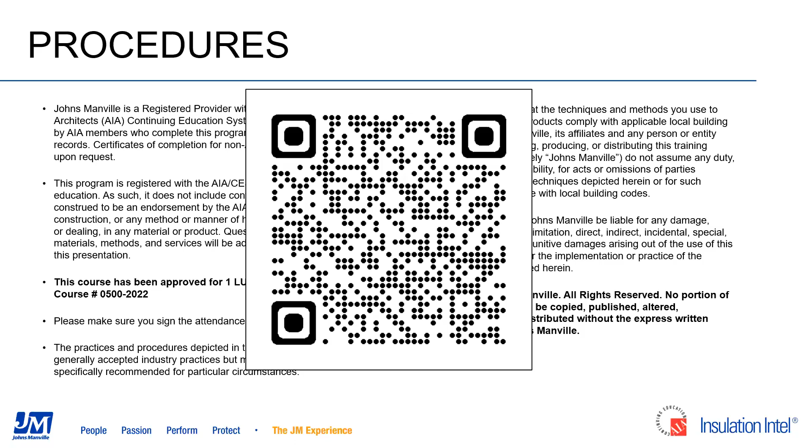So as an overview today, we're going to cover the history of modular construction, review a little bit of the market data, and discover some of the driving forces that are making this an attraction to the construction industry. Review design for modular construction, also look at benefits of modular. We'll cover some design considerations, and then towards the end, we're going to also talk about some of the solutions that Johns Manville has evolved over the last few years here to help, and then cover some additional resources as well.

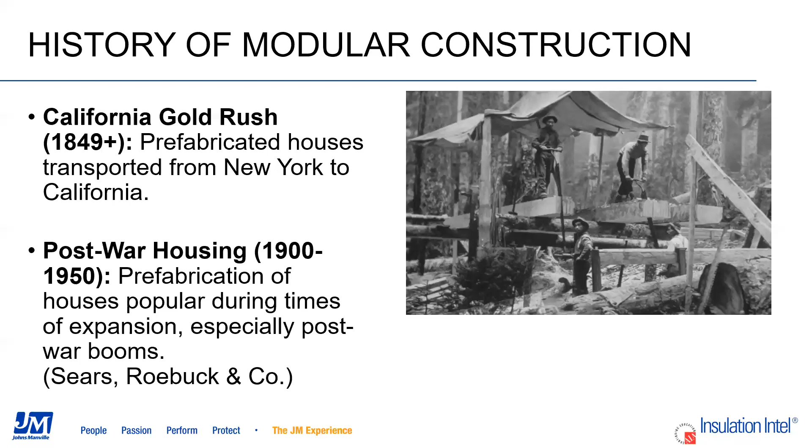The modular or offsite construction has been around since the early Industrial Revolution. Let's take a look at the history of offsite construction in the United States. Modular construction follows economic booms. The first one in the U.S. was the gold rush, following the discovery of gold in the western United States. Pre-cut materials were delivered to pioneers by the new rail lines to assemble on site.

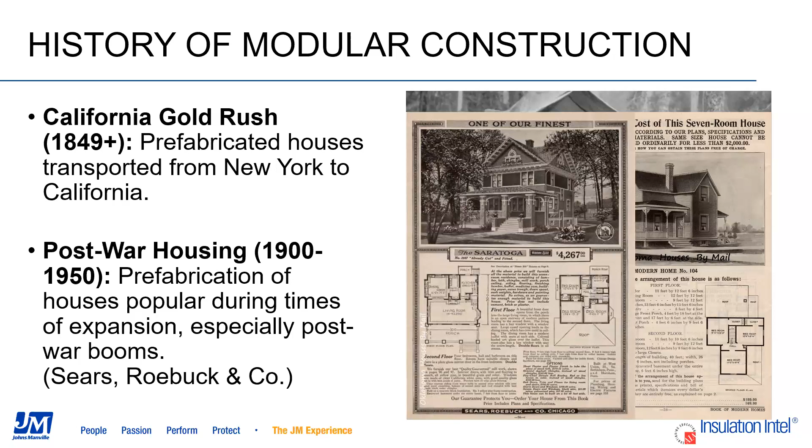Second notable boom occurred in the post-World War housing. After World War I, Sears and Roebuck offered multiple pre-cut material packages for designs that could be selected from their catalogs. After World War II, the actual off-site fabrication, or industrial manufacturing of house walls and components, began to occur.

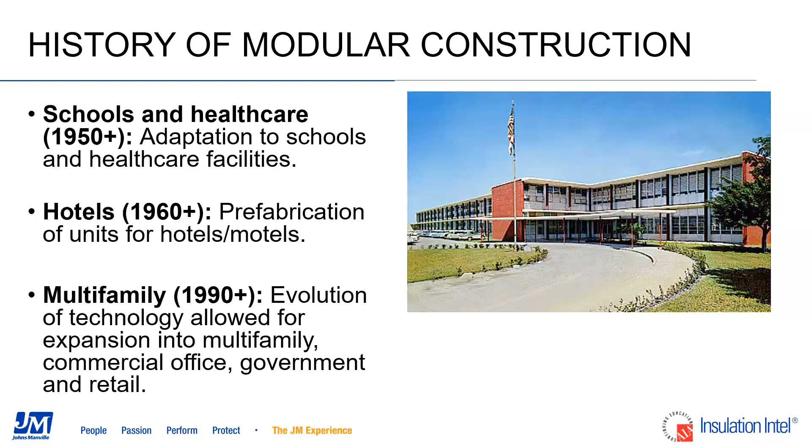Also during the 1950s, elements of schools and hospitals began to be built off-site and assembled on-site. You can see the repetitive units that encouraged this approach.

In the 1960s, we saw a boom in motel and hotel construction, marking the entry into the multifamily market that we see today. A lull in construction and innovation occurred in the 1990s, which saw industrial concepts applied to the boom in higher density multifamily developments as well.

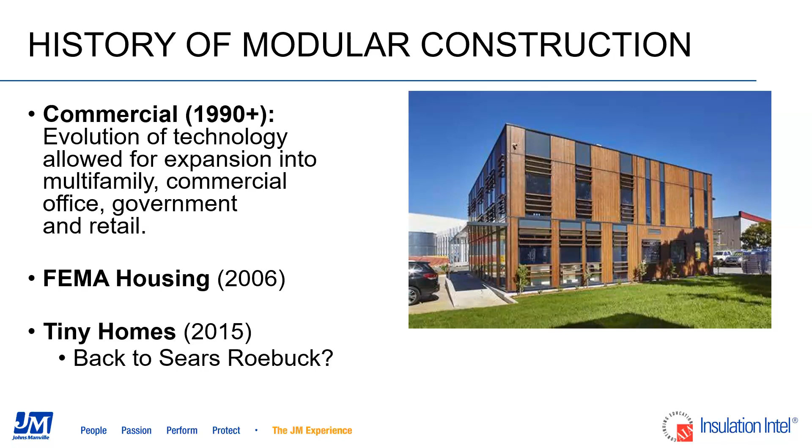In addition to multifamily, commercial and government construction benefited from efficiencies of speed of modular construction. FEMA attempted to implement this en masse after the Katrina disaster in 2006 with some success.

All the previous options are on the table at the moment, from large-scale development assemblies with lightning speed to tiny homes available online from retailers. As we can see, back about 100 years ago, we had the capability of ordering from a catalog an assembly or a package to build a home. It's very similar today because we have the internet, which we can use to order even small tiny homes. So we're kind of making a full circle. It's not new to our environment here.

So let's take a quick look at the market share of offsite construction and review the driving forces of why this construction method is gaining attention.

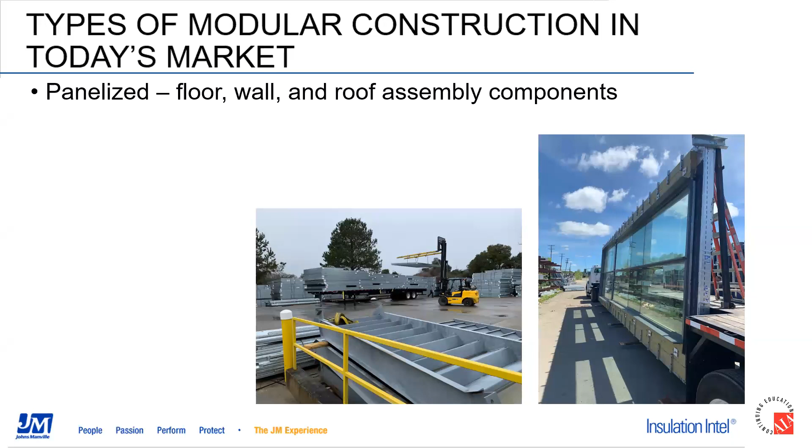There are several modular classifications in today's market. The first is an example of panelized assemblies, which are offsite factory walls, floors, and roof concepts.

One example of volumetric construction was made up of shipping containers. This is a popular delivery method for coffee shops, restaurants, temporary emergency response units, and residential.

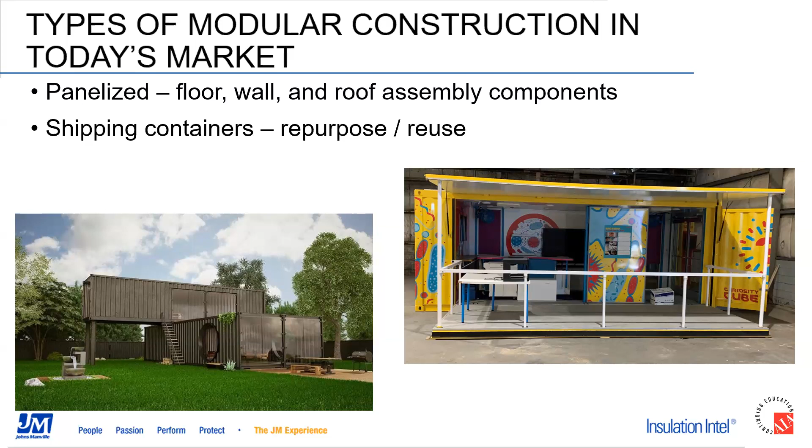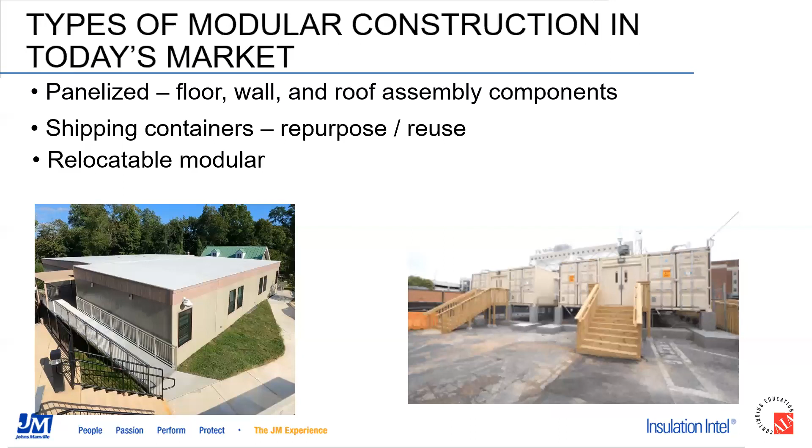Next is considered relocatable units. Don't mistake these for manufactured homes, as these modular buildings are used for commercial applications like school classrooms, medical centers, office complexes, and the familiar job site trailers.

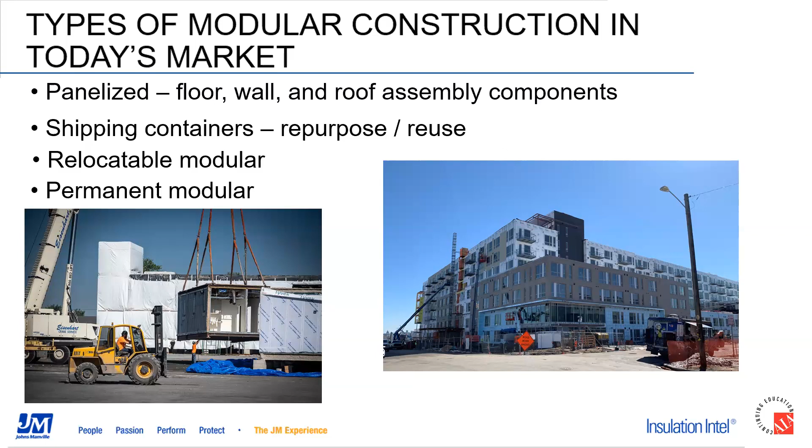Finally, we have permanent modular buildings, which serve a wide range of uses for multifamily, hospitals, hotels, office complexes, and of course single-family units, just to name a few.

A current look at the market share. When we include all aspects of offsite construction, the U.S. market share in 2020 was estimated to be about $27.5 billion.

Permanent modular construction is one of the fastest growing segments in the modular industry. Although between 2020 and 2021 permanent modular was expected to only grow 5 to 6%, the reality is the value of permanent modular construction grew almost 20%.

As you can see in this chart, permanent modular construction market share has doubled in the past 5 years, and it is anticipated that it will double again in the next 5.

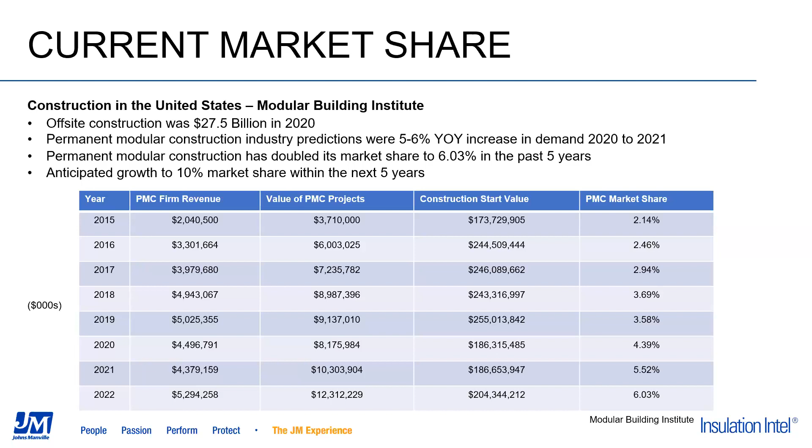So let's take a look at a quick case study. Each of these case studies has its own lessons for its stakeholders.

Carmel Place in New York City was New York City's first micro apartment building. The 9-story building includes 55 micro units as well as a gym, lounge, roof terrace, and garden, and was the first multi-unit building in Manhattan to be built entirely out of modular components constructed off-site.

The building was made up of 65 individual self-supporting steel frame modules, 55 apartment units, and 10 core elements. MEPs were installed off-site, and appliances and interior finishes were installed on-site.

The design team reported that it was a significant benefit to have a factory located nearby. This allowed for weekly visits during the manufacturing process, giving the team the ability to catch and prevent costly mistakes, and supported the increase of communication required for modular construction projects.

The Vancouver Affordable Housing Agency provides the use of currently vacant public land for temporary modular housing developments. These projects are guaranteed to use the land for at least 3 years, after which time they can be disassembled and relocated when the land is needed for a more permanent use.

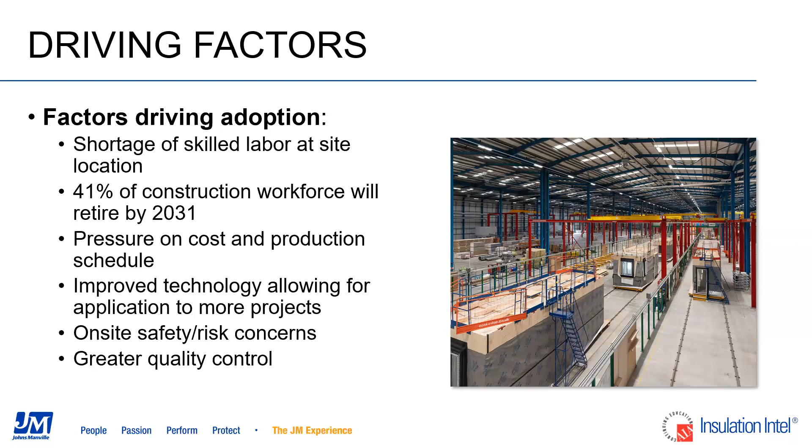Economic factors are making it more viable as well. The cost and speed are primary considerations. As we've all heard, housing shortages and the lack of affordable housing in our nation and across the globe is a huge issue for all of us.

Obviously with offsite construction, the benefits are shorter delivery times. For our clients—developers, builders, and owners—that means they're able to occupy their buildings faster, which then allows cash flow to begin faster, and also reduces the financial burden of financing a construction project.

Public sectors in most major cities—we've labeled London and New York as two large metropolitan areas that need as much help in the public sector as possible. But this is going across the nation, affecting everyone.

Cities like San Francisco, Seattle, Vancouver, and I'll even add Austin, Texas, are all considering modular solutions to help with the homeless population and provide shelters. They're also looking at options to help the lower middle income with affordable housing.

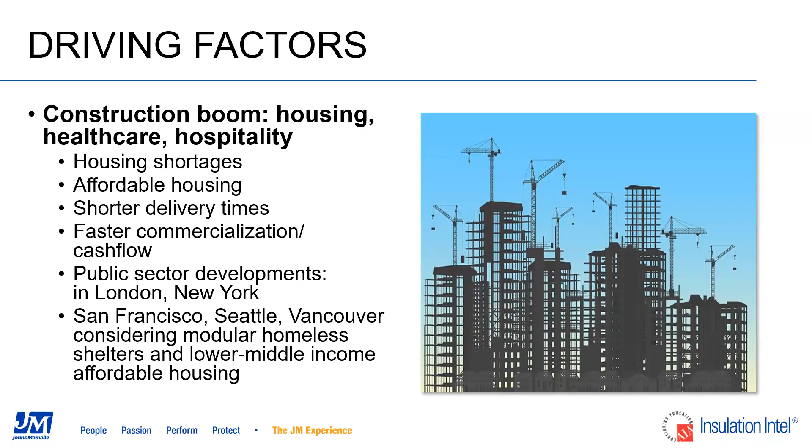I'm going to turn it over to Dwight to cover design for modular construction. Okay, thank you, Jerry. Let's now take a look at how offsite construction affects design decisions.

They're frequently self-contained—they'll probably have their own waterproofing installed, and they'll have structural integrity so they can be stacked and support the structure above. They're transported by truck and craned into place. They may be weatherproofed individually and on site, and hopefully they're weatherproofed on the way out there too. They contribute to the structure of the building and can also form the building core, so you can form stair cores and whatnot out of these stacked structural units.

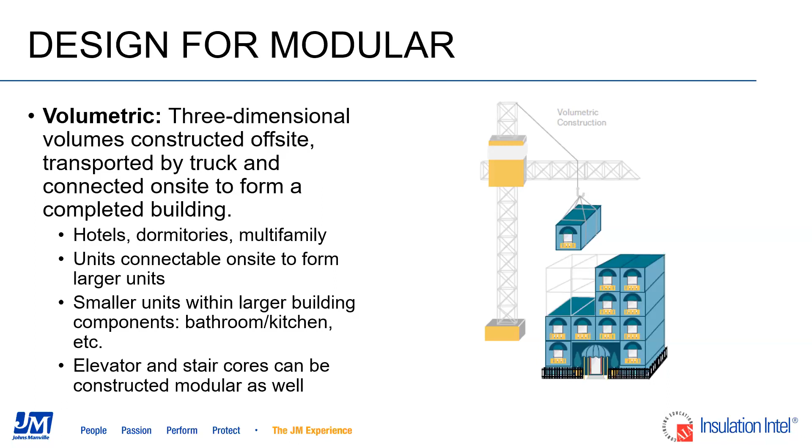Panelized units actually form building volumes on site after assembly. The core of the building is pre-built, probably due to the design program driving the approach toward panelization. You'll have the structure already built on site, then add the panelization to form the building enclosure. They can simply be framed walls, floors, or roofs, or more complex exterior cladding assemblies, complete with electrical, plumbing, and HVAC systems inside for on-site connection. Waterproofing is also a portion of that panelization process.

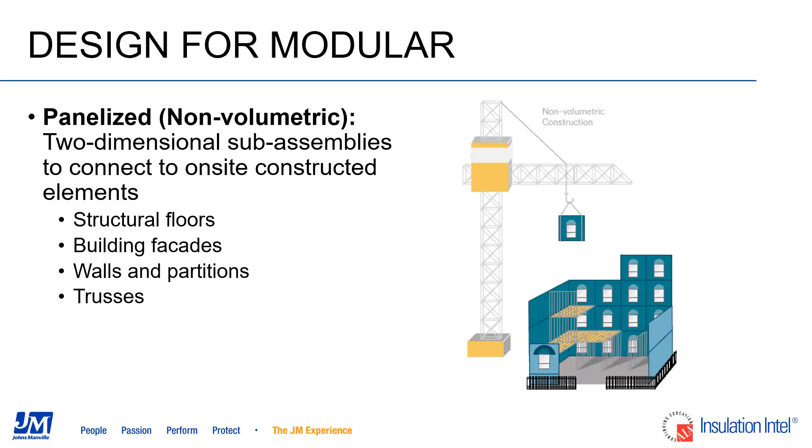More companies can do this from a technical standpoint, from GCs to manufacturers themselves who do the assembly. Less engineering may be involved to design and construct the panelized assemblies, but weatherproofing can actually take longer to achieve, leaving the building open to elements in the process.

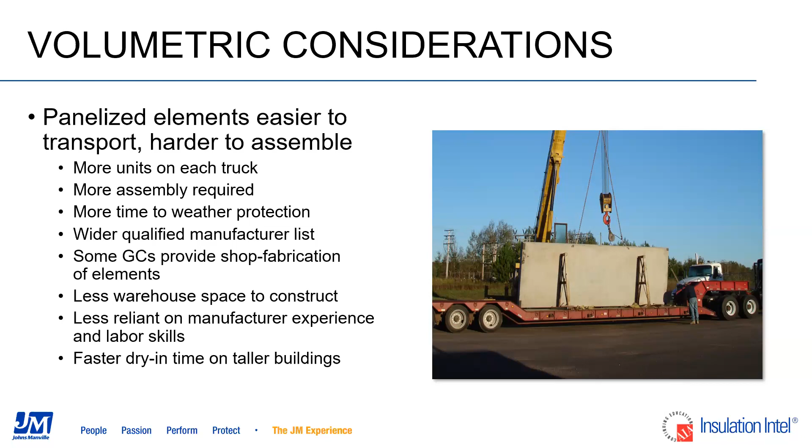Volumetric assemblies, however, require more engineering and design up front, but less time to assemble and weatherproof on site. There are transportation limitations, of course—the height, the width, what bridges you're going underneath, and whether you need to move any electrical lines. There will also be a need for a designated area for staging prior to assembly—you can't just pick them off the truck and put them on the building. You have to stage them properly, which takes space and logistics planning.

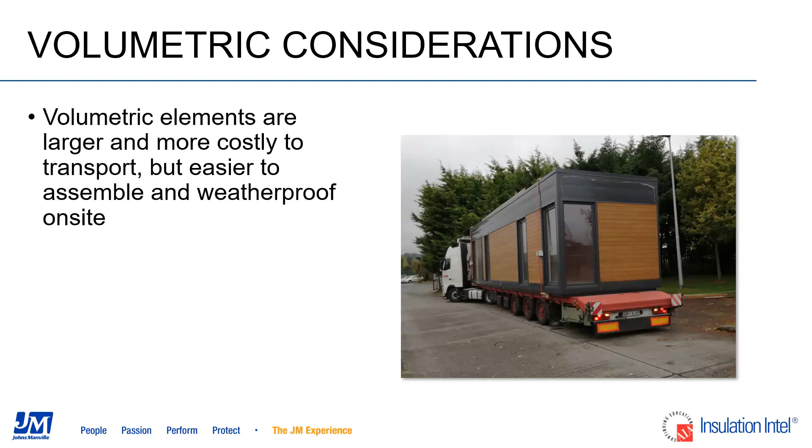So let's take another look at a successful project here. This is a case study for the Heart and Orthopedic Center at the Miami Valley Hospital. After initially considering volumetric construction of patient rooms as volumes, cost and efficiency in their pre-planning study indicated it would be better to break up each room into 5 modules: the bathroom, the head wall, foot wall, the casework, and the overhead MEP racks.

So the GC located a vacant warehouse about 3 miles from the project site to build the custom components. A mock-up of the bathroom module was built in the warehouse for hospital staff to experience and critique. The bathroom pods and dividing wall components were then assembled into a single patient room, and then assembled into single patient room blades so that several would fit on a flatbed truck for transport.

Assembly did require BIM level precision and early subcontractor involvement to coordinate. Ultimately, the use of prefabricated components reduced the construction schedule by 2 months and reduced the building cost by about 2%. So that's success in the offsite construction world.

One thing to note here is the offsite fabrication, transport, and on-site assembly were all done by Skanska, which operated as the on-site stick-and-fix GC. There was no actual manufacturer involved—the GC basically just prefabricated those components in a warehouse, using it as a kind of shop fabrication assembly facility. An interesting element to this case study.

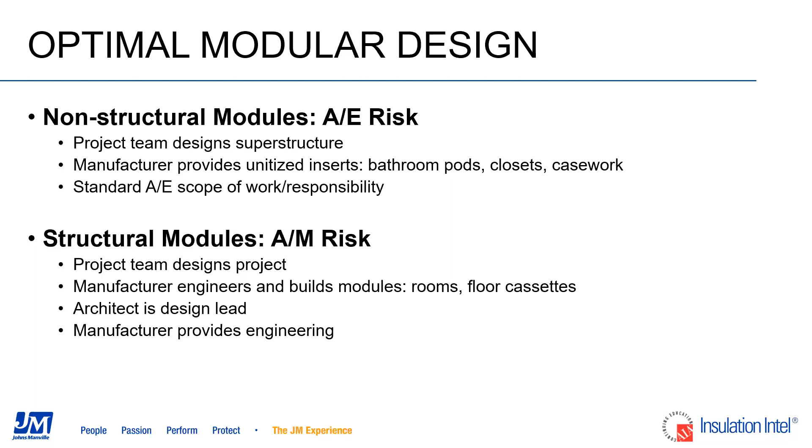The second model raises the manufacturer more to the design-build GC role, with the architect acting as the design lead and the engineering and construction performed by the manufacturer. Another GC could actually assume the risk of the project management, final assembly, and weatherproofing. So in that case, there would be 3 parties to the construction of that project. It's important to look at the different delivery methods and determine which is the most proper or appropriate one to manage risk during that process.

So whatever the risk profile, modular principles can be applied to nearly any construction type except heavy timber. Pre-construction percentage can range up to 95% of the work. Each project has an optimum level of pre-construction determined by multiple factors, including labor rates, contractor availability on site, whether or not you have manufacturers you can bring on board early or later, and of course site and financing conditions.

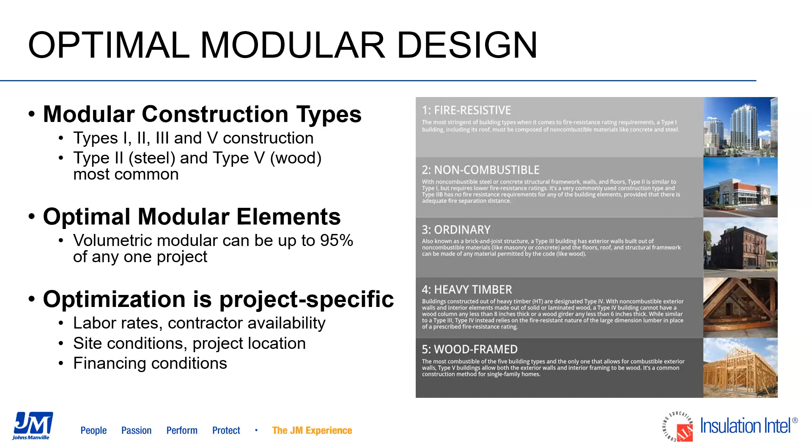So whatever the percentage chosen, offsite construction has multiple benefits, and the right balance is determined by the capabilities of the team and the characteristics of each project. It's an examination—you have to look at the entire process and determine the best way to perform it. Once you get to the end, the project is done, but really the savings comes from choosing the optimum process.

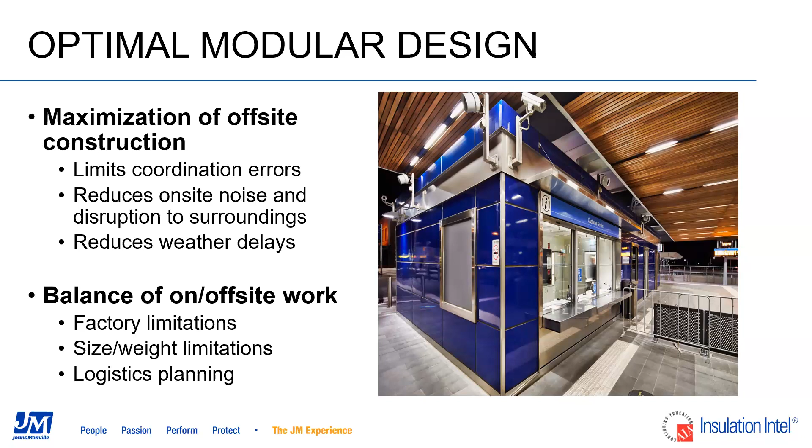So the ultimate goal is to speed up the construction process and streamline it as well. Design for manufacturing and assembly is actually a defined engineering process.

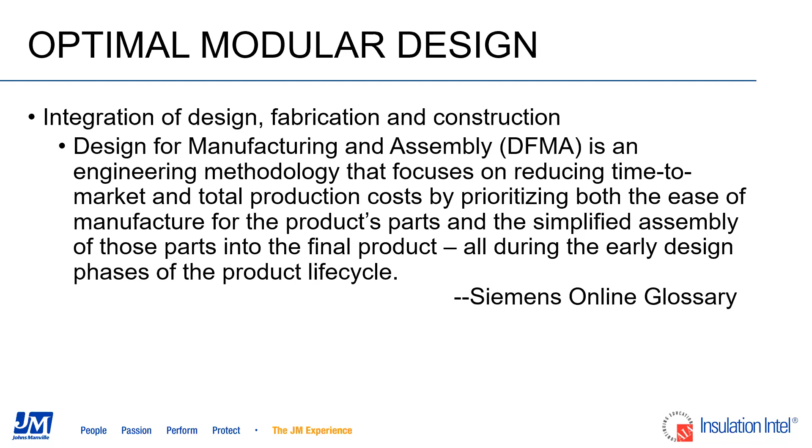Once the building components are actually designed, it's time to put them together. Since this occurs indoors, there's no need to protect the finishes from the elements, so they can be built the easy way, from the inside out. Think about the process: if you're building on site, you've got to create that weather enclosure first, basically dry it in, and then you can begin to heat the interior and put the elements together, putting those expensive finishes on. If you're in a warehouse, that enclosure is already constructed—you can start by carrying the drywall panels inside, build those interior walls, and then eventually finish out on the exterior.

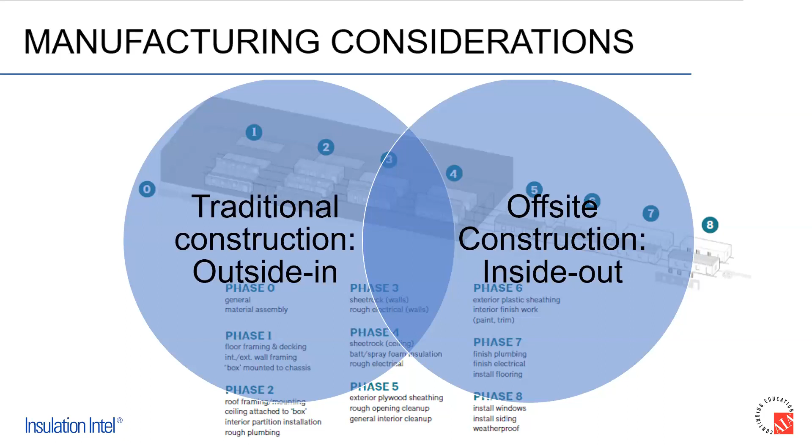So we looked at the process of modular design and construction. Let's look at some of the reasons to consider this approach. These reasons can be summarized in 3 concepts.

One is the quality of the product that's produced. Production in a controlled setting is obviously going to be less exposed to the elements and will generally have better, higher quality. Another element to quality is there's actually more material used in a volumetric design, because you have to create each unit as a structure, so they're more significant and more solid when delivered on site.

Productivity during the process. Workflow is much easier to plan rather than having people running around a messy project site. You can coordinate those movements a lot more efficiently in a warehouse.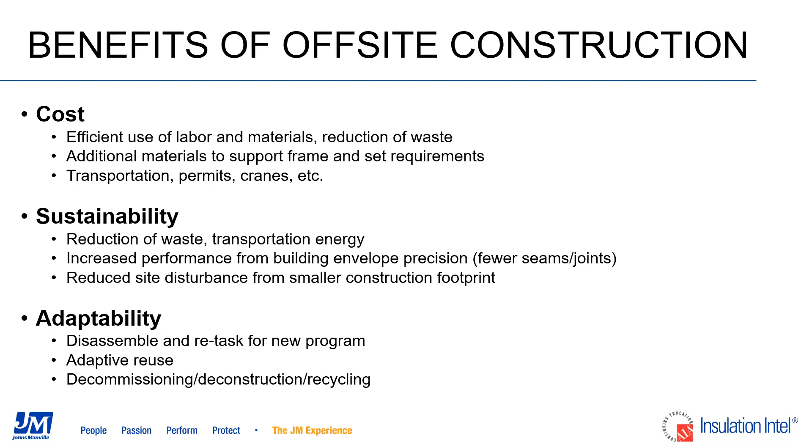So let's look at a project designed with those goals in mind. This is a case study for the Harvard University Pagliuca Life Lab. It was designed to meet the need for specialized laboratory space for startups. The building includes a ground floor of business office space and a second floor of lab space. The university chose modular or offsite construction to build as quickly and cost effectively as possible.

It was ultimately completed in 7 months of construction, 5 months less than their on-site construction scheduling indicated. This limited the on-campus disruption and allowed for later relocation to a more permanent site in 5 to 10 years, as was their plan. The building is composed of 34 modules, constructed off-site over a period of 2 months.

Completed to 85% off-site, they were steel framed with pre-poured concrete and composite steel deck, with finishes, MEP, and cladding system attached. The type of assembly actually encouraged the use of static production methods, which meant the modules were worked on by various trades simultaneously in place, rather than sequentially as with the assembly line method of production.

In some of the photos you've seen rail tracks moving down the lines. You also have this air lifting method that basically uses 100 psi of air to move modules from one side to another of the factory. That was not used in this case due to the weight of the units with the concrete.

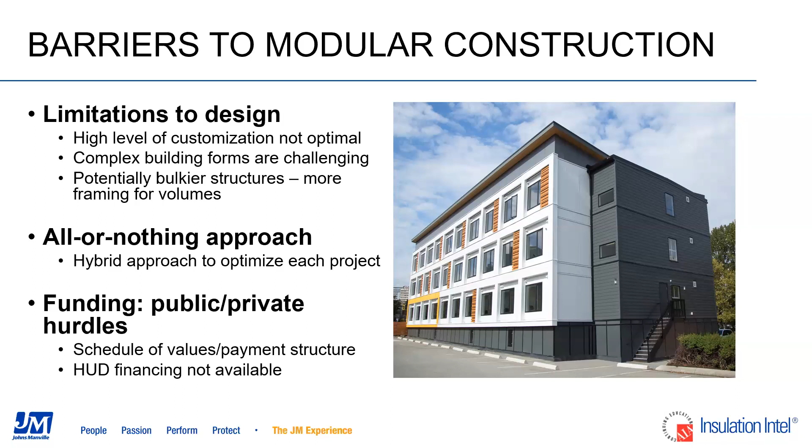So now let's look at a project that had a few complications with execution, shall we say. The 461 Dean Street is a 32-story building that includes 363 apartments and ground floor retail space. The down cycle of the economy in 2008 and pricing with local labor unions led the developer to the modular construction method. The goal was to reduce the cost by 20% and shorten the schedule from 30 months to 10. If you're familiar with modular scheduling, that seems optimistic. 30 months to 10 can be done with proper coordination.

But this building contained 930 steel framed modules arranged around a double loaded central corridor. The desire for customization resulted in 225 unique module types, including the elevator core and stairwells. Each of the project's prefabricated curtain wall panels includes a compression gasket around its perimeter that forms a seal with adjacent modules. Sounds good, right? These seals were installed on the modules off-site, which is not typical due to limited adjustability when you get on-site. The contractor had difficulty controlling the geometry of the modules during handling, and a number had to be readjusted on-site, adding a layer of complication with waterproofing.

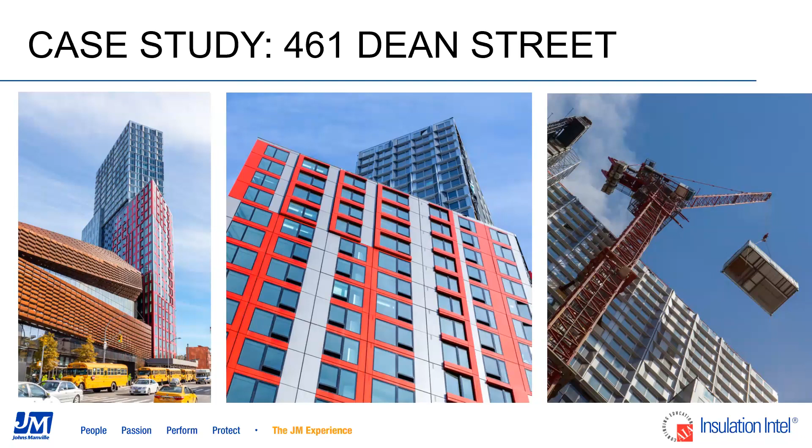The project suffered significant delays due to the inability of the manufacturer to produce modules as quickly as required to keep up with the crane on site. So they couldn't build them fast enough to stack them. Some modules had to be gutted and renovated on site because of water damage caused by improper detailing of the temporary roof membrane on the lower level modules, which allowed water into the building interiors.

Once the lawsuits were settled, the developer took control of the off-site fabrication operation and hired a different contractor to oversee the on-site work. In addition, the development team underestimated the time required to set up the fabrication facility, train the workers, and establish a reliable supply chain for a new off-site manufacturing facility, with a GC lacking modular experience.

Ultimately, instead of 10 months, it took 4 years to top out the project. This one doesn't really say whether or not they met their pricing goals, but I would assume not, based on the extended time it took to complete the project. There were other factors too. All the red flags seem to pop up: unique module types, too many of them. You also had labor unions involved, which wanted to participate in the process. And whenever litigation gets involved, things get stretched out.

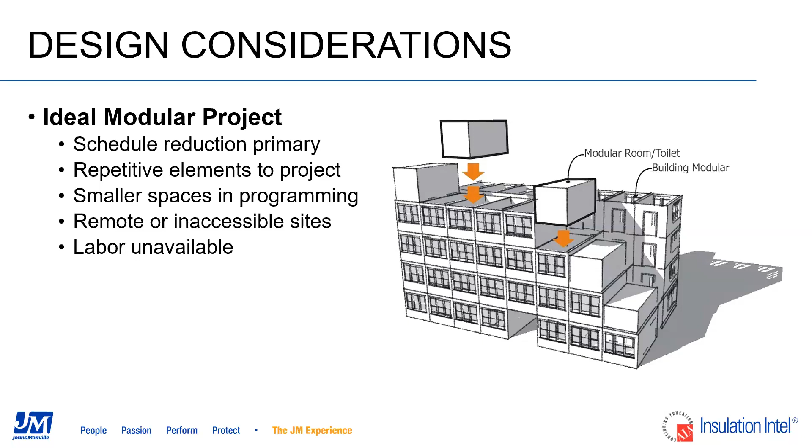The most important effect on designers in the design process is to analyze the project and decide early on, with all the stakeholders involved and everyone informed as to the pros and cons of the different approaches. This is important because there can only be limited changes when the building goes into production. Again, back to manufacturing - manufacturing is the driver in this type of production method. Changes are very difficult and expensive at that point and can't be applied to all the units. So ideally, programming in schematic design will indicate the best direction of the project. If not, design development is the last phase to consider the change without significant redesign and expense.

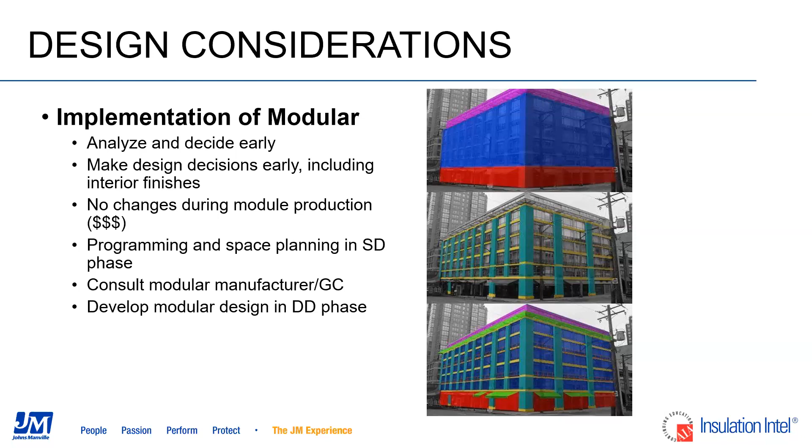So engagement in the process is key. The design-bid-build process does not have sufficient feedback mechanisms to get the right information to the right people at the right time, and encourages waste. There's a formality to the design-bid-build process which stretches out the time schedule and doesn't allow proper sharing of information. That formalized process does not lead to the optimal outcomes, shall we say.

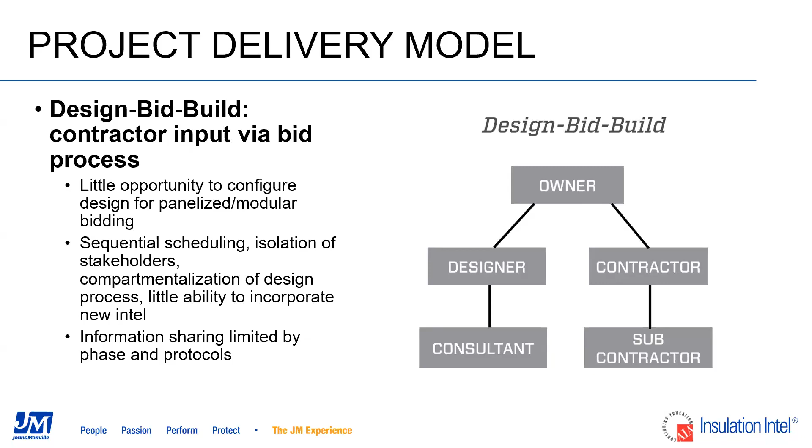The optimal delivery mechanism is integrated project delivery, or IPD. This opens up collaboration during the design process and encourages the flow of information between team members. Including a manufacturer in this feedback loop is best practice, so get all the information from all the elements.

Whether it's IPD number 3 or number 4, where it's a flow of information between the three stakeholders, or if it's the hybrid process pulling in more information from a manufacturer rather than a subcontractor, plus the contractor's engineers, clients and consultants, getting that information flow correct so you get the right information at the right time is key.

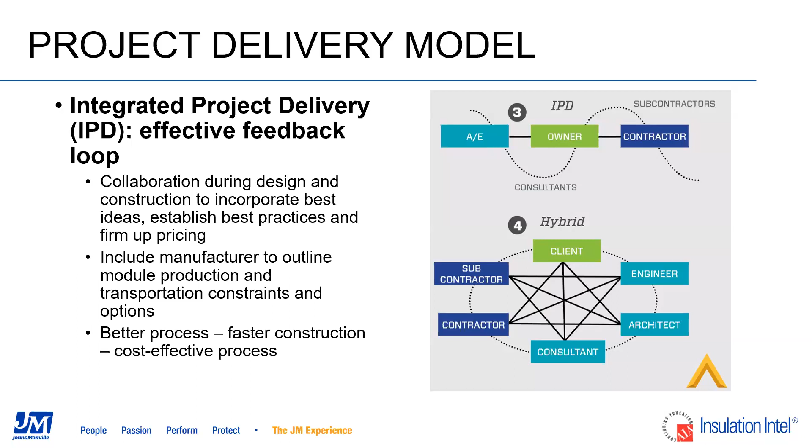Integrated project delivery is actually based on the principles of lean construction, or lean production methods: producing the right product at the right time and the right quality for the customer. This method originated with Henry Ford and his famous Model T, and was refined into the Toyota production system by Taiichi Ohno, who added another level to this.

Henry Ford was famously rigid in his approach. He was all about reducing waste and increasing efficiency, whereas Toyota allowed for variability in the manufacturing process. Back to the manufacturing element, allowing for a little bit of flexibility in what you can create did add a different angle to the lean method.

So not to overstate it, it's simply a manufacturing ideology or methodology, but it is producing the right product at the right time and the right quality for the customer, exactly what you need and nothing more. It's a good goal, but let's see how it dialogues with the construction process.

Lean construction is a design and execution methodology to minimize waste of material and effort in order to generate maximum value. It really reduces the amount of waste while generating maximum value for the building owner. Offsite construction takes this methodology one step further, which leads back to its original origins in manufacturing.

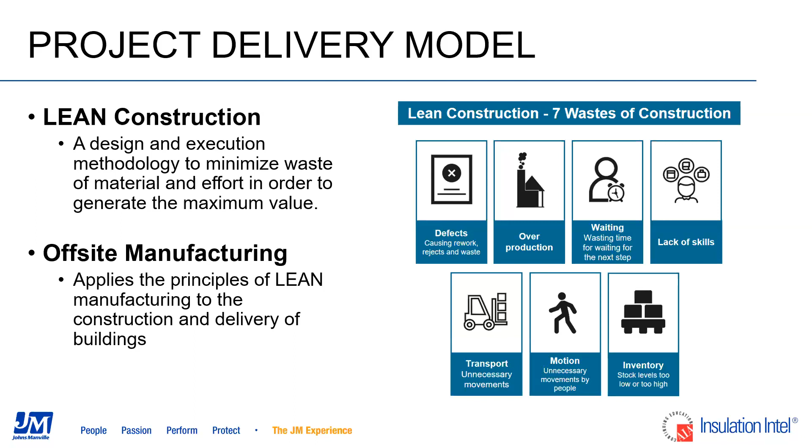Lean design, once you extract that for design, the principles still apply. It's not a manufacturing process when you're working in design, but it is a process that will reduce waste and rework by getting the right information to the right people at the right time, to make the best decisions for their client and the project.

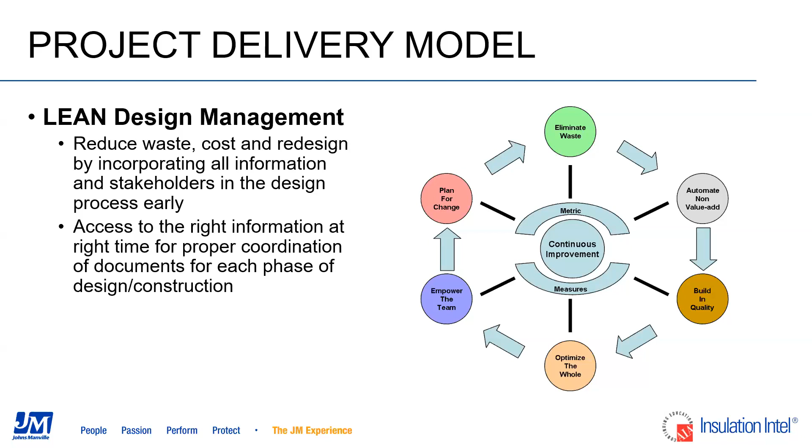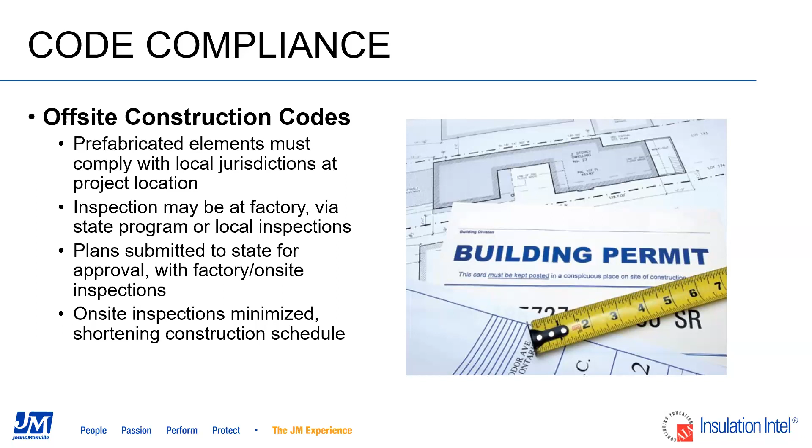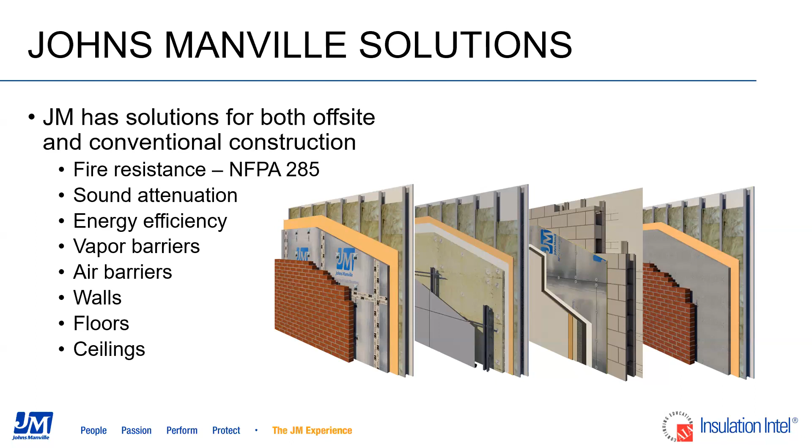Johns Manville has developed multiple assembly solutions for offsite construction using our exterior envelope materials, our continuous insulation materials. Each of these assemblies has undergone rigorous testing for racking strength, water, air, vapor intrusion, fire, and acoustics. Our latest polyiso sheathing assembly has passed NFPA 285 with ACM metal panels, the most difficult panel to pass with, which allows a full range of materials to be used for cladding systems on your projects.

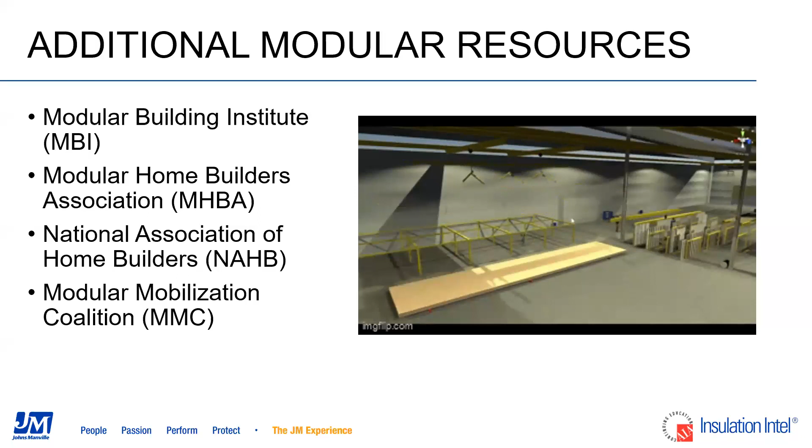So I think that's a unique approach, but it's definitely helpful.

When it comes to Johns Manville, as Dwight just mentioned, we have determined a number of different assemblies using our product lines, and currently we have the largest portfolio of building insulation products in the United States. We manufacture everything from fiberglass, mineral wool, blown-in fiberglass materials, spray foams, and polyiso boards, as well as some specialty products like Go Board, which is a polyiso tile backer board.

What gives us an incredible advantage here is that we have the capabilities of creating these hybrid type systems. We understand that not one particular product line fits every need for every person in every situation, but we have the unique ability to create those assemblies Dwight just mentioned, utilizing a combination of materials, or one material may complement another, so that we have a vast selection of solutions. So I believe now I'm going to turn it back over to Natalie and let her finish us off.